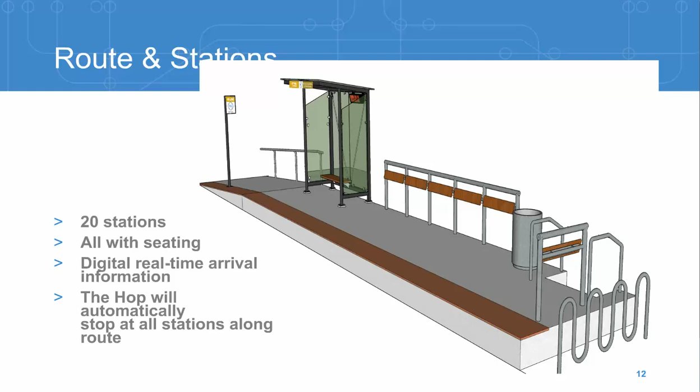There's 2 doors on either side of the vehicle, so we have center street stops and also curbside stops. It provides level boarding so that people in wheelchairs, parents with strollers, people with bikes can roll on the vehicle a lot easier than having to step up in your typical bus. This is a rendering of what the stops will look like. It's fairly low tech, a higher curb to provide for that level boarding. We will have information on the next arrival at the stations. Some will be center to the street and some curbside.

Operations, we're looking at 5 a.m. to meet that first Amtrak trip out of the intermodal station, until midnight during the weekdays, and it'll change a little on the weekends. So where are we building the first line? The first initial line is the blue line here, the main line. This is the intermodal station where Amtrak and a number of regional bus lines operate. It'll go over to the historic 3rd Ward, the shopping district with a lot of residents, up through the employment center just east of the Milwaukee River downtown, and then up to the lower east side, a fairly high density residential neighborhood.

And then we also have started this lakefront extension, which will operate as a second line, a short second line to the lakefront. It's not contingent, but the schedule is contingent on the development that's taking place right at the edge of the lakefront, a location that we're actually going to be going through, directly through the development. You'll get a picture of that here later on.

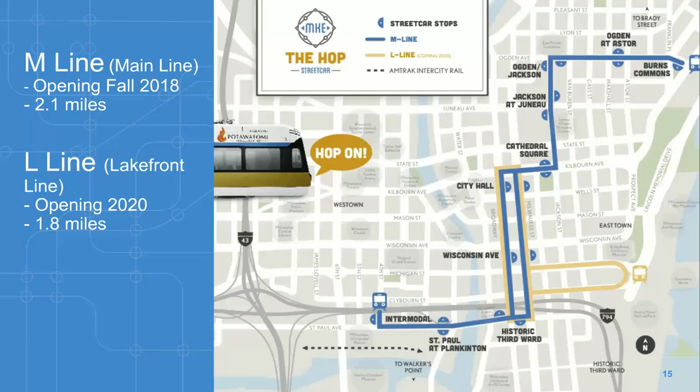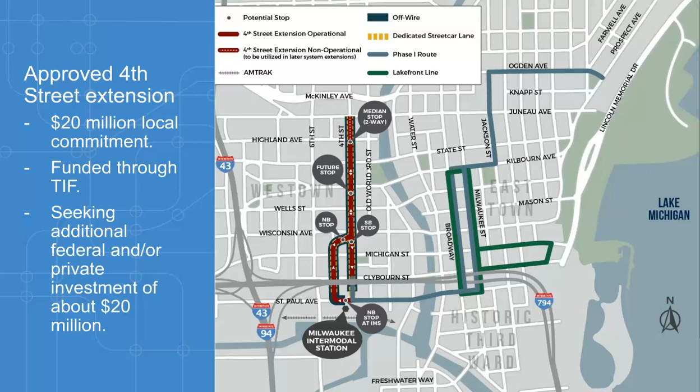We're also applying for, and hopefully soon we'll be developing, another extension up to where the new Bucks Arena is being built, providing connection to all the development opportunities up there. Many years ago there was a freeway spur that came across the north side of the Central Business District that was removed, and it is providing a lot of opportunity not only for the Bucks Arena, but also other development that's taking place. So we want to make that connection.

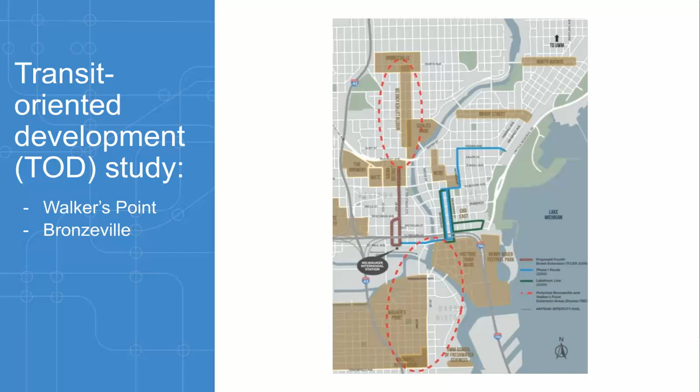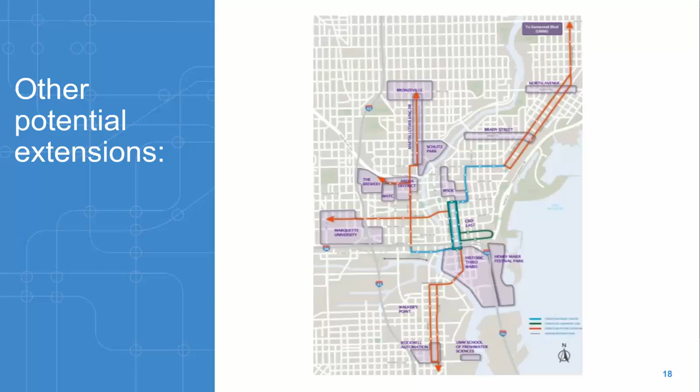We're also looking further into the future to provide connections into the nearby neighborhoods of the Central Business District. There's a study going on currently that will hopefully set us up for another application into the typical capital improvements program that the federal government has. And ultimately having a fairly sizable system that not only connects to nearby neighborhoods, but also Marquette University just west of the downtown, University of Wisconsin-Milwaukee to the north of the downtown, and then the airport to the south of the downtown.

Construction is pretty much complete outside of what we have to do to finish up on the lakefront line. We have 2 vehicles. The third vehicle is coming hopefully next week. The 4th and 5th vehicles will be coming in August. And all the training, all the testing should be completed so that we can open up here sometime this fall.

Why are we building this? A comprehensive transportation strategy that we've had for some time. Trying to get everybody who works in the downtown into the downtown via automobile is not a very efficient, effective way to operate within an urban city. We do need transit. We need other ways to get around. We need to make good connections.

We have an awful lot of on-street parking and off-street parking. We have a parking management system that provides direction to that, and now through the streetcar we're expanding the access to that parking so that you don't have to necessarily drive directly to where your destination is. Providing connection to the bike share system that we have, the existing bus operations, and, as I mentioned, the intermodal station, Amtrak, other regional buses coming into the downtown.

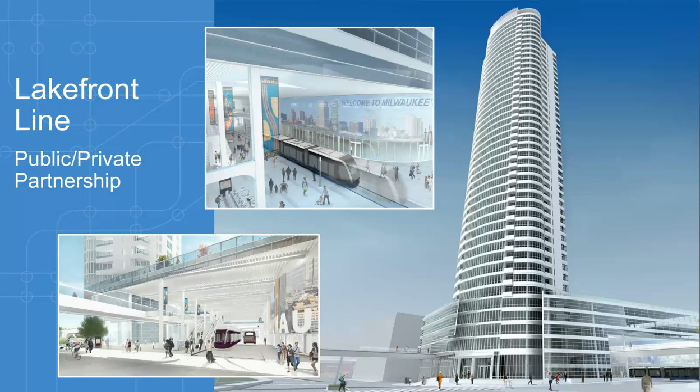A number of developers are starting to recognize the benefit of the properties along the route. BMO Harris Bank in the Central Business District is building a new tower right next to one of the streetcar stops. The developers themselves are starting to say that's not necessarily the only reason why they're developing it, but certainly it is something that they're putting in the mix of their considerations.

This in particular was just announced. This is a very underutilized 8-story building that has been vacant for many, many years. It was just purchased, and it was purchased specifically because it is on the streetcar line. So it was really good news to see that happen.

So we'll move on a little bit here to the route access and operation aspects of things, and some of the public outreach and education that we're having to go through to just get people to better understand what it is that we're building and what they're going to see on the route.

So, just as in many other cities around the country and around the world, streetcars are a level of transit, fixed rail transit, in and of its own. It does operate in the street with other vehicles. It operates alongside the automobiles, the buses, the trucks, the bikes. We do have a few segments where we're operating in an exclusive lane, and that's where getting the vehicle out of those exclusive lanes into the shared portions in a safe manner comes into play. And we do have to do some specific things to accommodate that. But in general, the typical rules of the road apply.

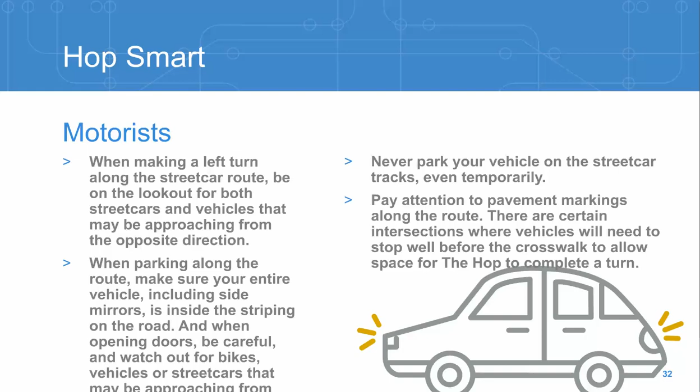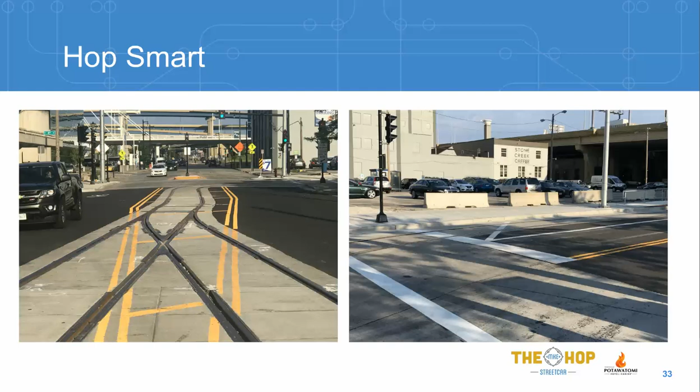Obviously, as I'm sure many of you notice as well, motorists don't necessarily always follow every rule of the road or every pavement marking that you have on the ground to a T. So it is important for us to help people recognize the importance of this moving forward along the streetcar route.

This is one that is going to be a little bit of a challenge, I think, for us, but we are going through a pretty good level of public education on this. These markings here, you've got your center line, you've got the line that's defining the parking line, and we have to have everybody who's parked along the streets have every piece of their vehicle inside those white lines. If there's a mirror that's extending out over that outer edge of that white line, that is in the dynamic envelope of the streetcar, and then that operator has to stop and go through a certain procedure or protocol to get that vehicle moved.

Most of our parking lanes, we've tried to maintain 8.5 to 9 feet. There are a couple locations where we run into problems with delivery trucks and that sort of thing, and we've had to make some special accommodations, which I'll show you as well. So this will be an interesting education of the public. We are going to be operating probably in another week on the full route, and that'll be the starting point of that education.

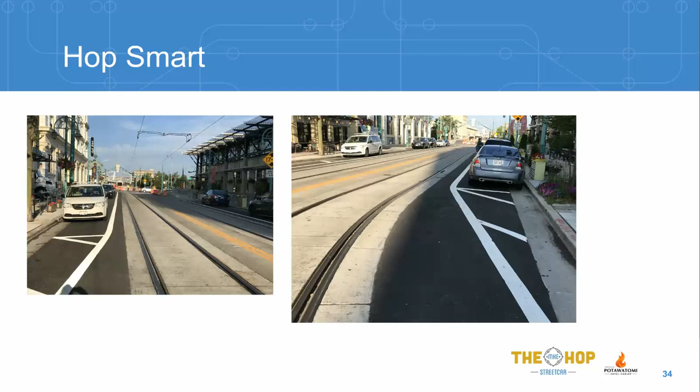And ultimately, there is a citation. If you can't get people to comply, obviously they can be cited for blocking the roadway.

This is a location, actually, this is Jackson Street, and it's on the backside. There's not a public market, but the Metro Market, a grocery store that is right here, and they get all their deliveries from behind here. And typically there is a loading dock here, but the trucks come in when they come in, and you can get a pretty good string of trucks there trying to deliver what it is that they're delivering. And so we,

versus having them deliver and stop in the parking lane, which we didn't have space for, we've accommodated a space which will operate for that two-way left turning movement to driveways there, but also give them a space that they can actually stop and perform their deliveries from the center of the street. And we did go through this during the construction phase, and it actually worked very well. So it's something that the market has been working with us very closely on to make sure that their motorists are in compliance.

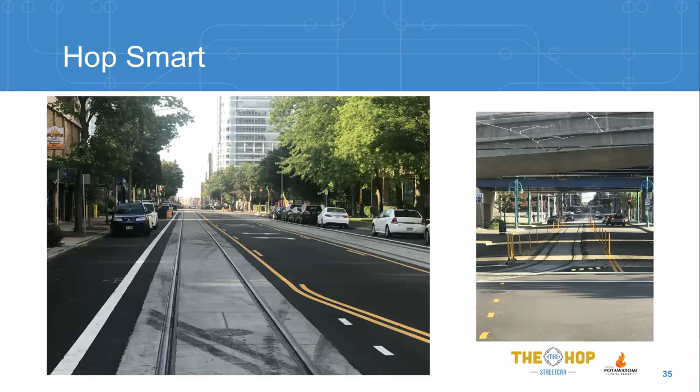Pedestrians, again, very, very typical messages that we need. I mean, this is a large vehicle. It has more of a stopping distance. It's not much different than your buses and trucks that might be operating on the street. So it's really reinforcing the rules of the road and helping people understand.

Cyclists, there are some unique aspects to having rail on the road. I bike commute to work every day. I've been faced with a lot of different predicaments, a lot of different things in the roadway that you have to be aware of and you have to manage around. And we've built one more thing that we have to make sure that people understand how to best accommodate their cycling paths over tracks. So we encourage people to cross the tracks at as close to a 90-degree angle as possible. You want to be as upright as possible when you're crossing the tracks, especially if it's raining out, a little wetter.

And practice two-stage. If you're not comfortable or as skilled of a cyclist to be able to cross the tracks at certain lesser angles, we're trying to encourage them to practice that two-stage turn, which I think was talked about earlier today in another session.

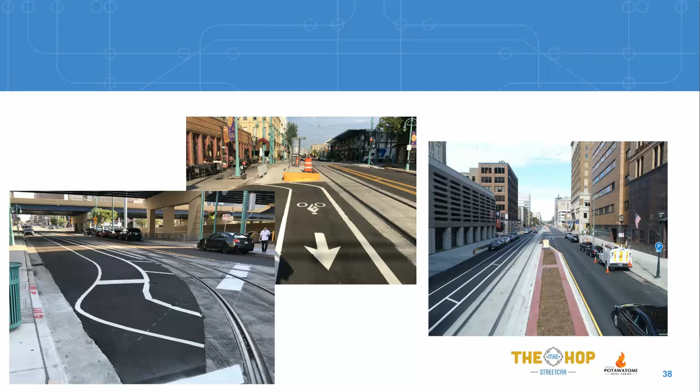And as I talked about before, obviously every property owner that is along the streetcar line, they have things that they have to do to manage and operate their buildings. And so, we've put in place basically a weekly training period that individuals can come out and go through kind of a streetcar familiarization class. For those who are actually doing the work in the public way or adjacent to it, there is a certification process that they would have to go through before they can get a permit to do that work. But we're trying to make it as simple as possible. We are actually going out to many of those building managers as groups, so they don't have to necessarily come to us. So at least they become familiar with it.

I think early on in all of this, there were a lot of fears that it's going to create problems for our police and our fire and the many buildings and operations that take place. And once you get the operating procedures in place, get the emergency operating procedures in place, people become very proficient in how they need to accomplish something. And it no longer is seen as something that's inhibiting them from getting whatever it is they need to get done.

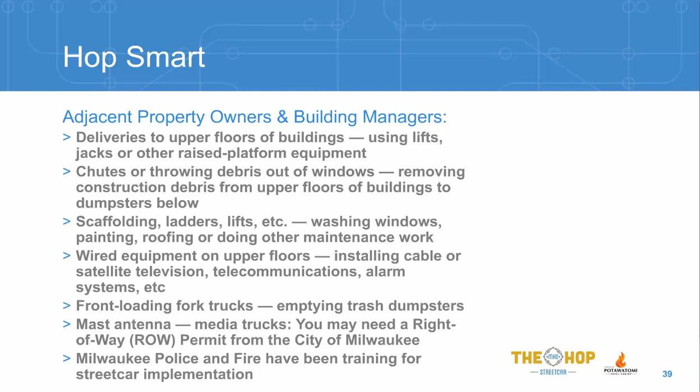I know the training exercise that we went through this morning went very well. Had to do with fighting fires on some of the taller buildings that are along the route. But everybody seems to be on board now. We've visited some of the other communities that have streetcars, learned some of the best practices that they have. It's just another piece of infrastructure, but the access and operation is still there.

The future of streetcars is looking good when it comes to that overhead contact or overhead catenary system, the power lines. One of the things that we have with our vehicles, we have an onboard energy system. And that really actually started because our operation maintenance facility is built directly under I-794. And one of the conditions that we had for building there was to not have any of those overhead wires, since obviously you have freeway structure above you. They need to be able to inspect that. Relatively new freeway structure, but they needed to have full access to be able to inspect that structure. So there are no wires on our operation maintenance facility.

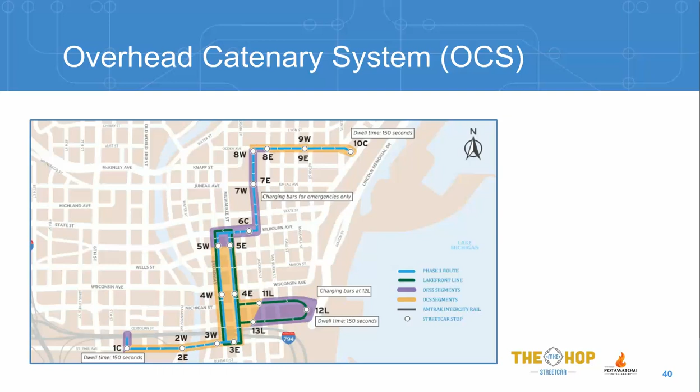So I guess with that, I'd like to open up to questions.